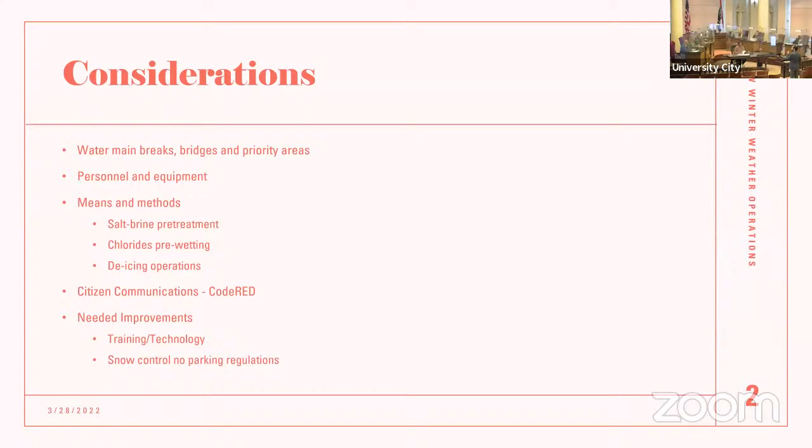Under the winter weather operations, I have the following considerations: water main breaks, bridges, and priority areas. Water main breaks, unfortunately, occur even in the winter time, during dry winter weather, and they cause icing hazards on our roadways. We cooperate and collaborate with the Missouri American Water Company for responses on these occurrences, and they are responsible for the public water supply.

They explain that the supply water temperature affects their infrastructure in the winter time, and they probably suffer from aging infrastructure also. We have an increasing trend, unfortunately, of these occurrences in the winter time. When these happen, we respond as well as demand the water company's response to secure and make safe those streets for the traveling public.

If they are private water lines, then the responsibility falls on the property owner to take action and have it repaired. There is a county program available for it, and usually we guide the property owners in that process to prompt their action. If not, we collaborate with the Planning and Development Department to take code enforcement action.

Bridges are our high priority during winter weather because they are exposed to cold air from above and below, especially a tall bridge such as the Old Bonhomme Road Bridge over the I-170 highway. Because of the airflow under that bridge, it tends to ice up faster than the others. So we need to prioritize those items of work.

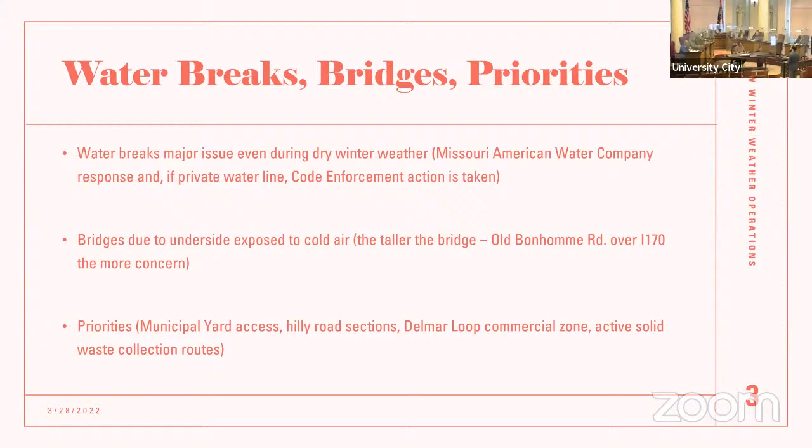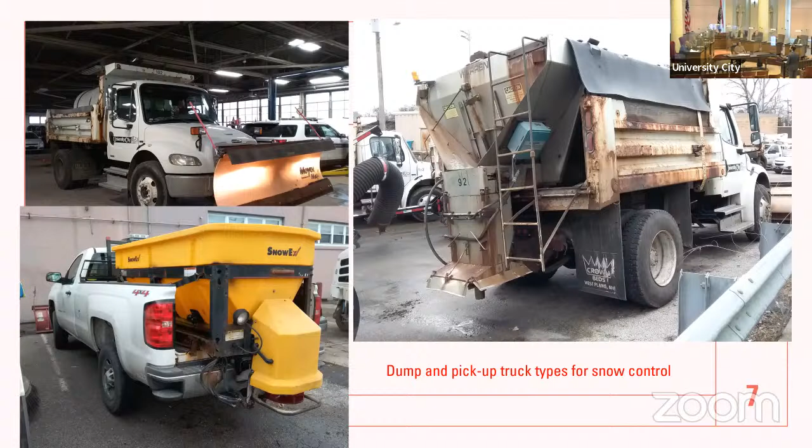Salt brine is made in the shop by adding water to salt and mixing. There's a mixing tank that creates a certain salinity for a liquid de-icer application. This is sprayed onto roadways before the forecasted winter weather system arrives, if the temperatures generally hold above 20 degrees Fahrenheit. Brine is not effective when we go below 20 degrees Fahrenheit. Brine prevents snow from sticking to the pavement and aids the plowing efforts, as well as allows the road to become drier quickly.

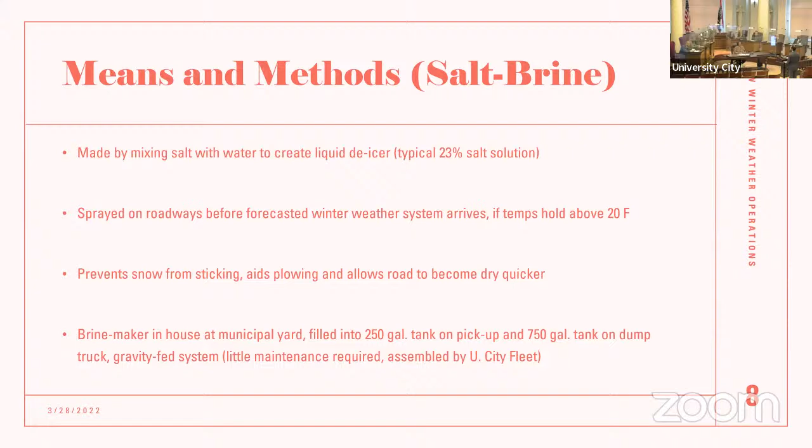This material is made in-house. We currently have a 250-gallon tank on a pickup truck and a 750-gallon tank on a dump truck. This is a gravity-fed system, so little maintenance is required. There's no pump between the tank and the sprayer; the only pump is used between the mixing tank and the truck.

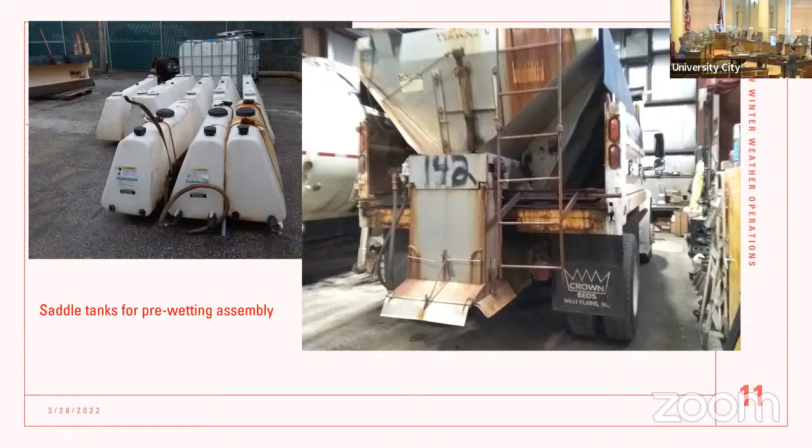Chlorides pre-wetting is another consideration. This is done by saddle tanks. I'd like to show you that. These are saddle tanks. Saddle tanks go under those triangular areas under the truck's spreader and are piped into the spinner, and before the material is dropped onto the roadway surface, this helps with wetting the salt.

Salt is more effective when it's wet, and it does not bounce off pavement when that happens, and this increases the de-icing effectiveness of the salt up to 30%, which is quite a bit. Salt brine effectiveness is reduced in low temperatures, such as 20 degrees or lower. For those applications, there's another material available, that is calcium chloride.

Calcium chloride is currently not in our arsenal, but it can easily be added. We have tanks available for it, and especially for pre-wetting operations, those saddle tanks, we would fill them with calcium chloride instead of salt brine, and use it that way. Plowing is still important. We need to plow first before applying the de-icing materials. And like I said before, those materials that remain on the pavement help with the later events when they occur.

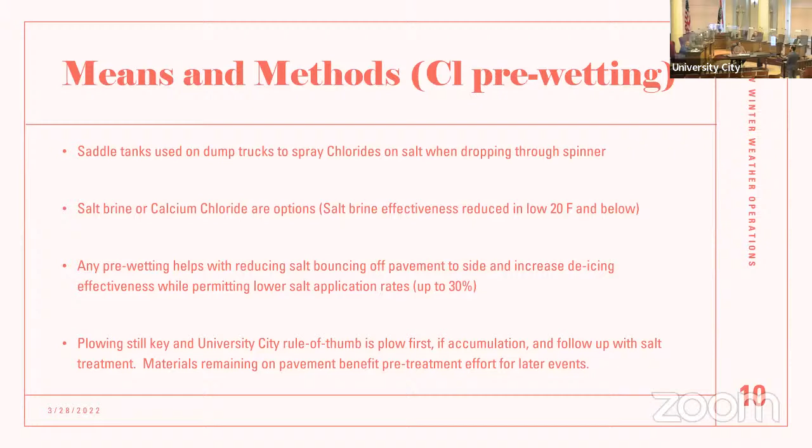For de-icing operations, one thing to repeat about salt is that salt does not actively de-ice until and unless it goes to liquid form or brine state. And so an ineffective method is to address everything after the fact. That is a top-down application. An effective method is a bottom-up application, that is pre-treatment and continuing plowing, so that when we plow, we open up that surface where we can apply more treatment so that it does not build up on us.

With the equipment and methods that are on hand, we can specifically tune our application to specific needs, so that calcium chloride can be used if we are down to the teens. Beet juice is another application that some agencies use in our area, that is used for longer effects. If the event has extended duration, beet juice tends to remain on the roadway and maintain its quality for a longer time.

We have not experimented with beet juice so far. It has some organic qualities that are not always desired, especially in residential neighborhoods. It has a little odor. But these are options that we have because of the equipment and ability we have in the shop.

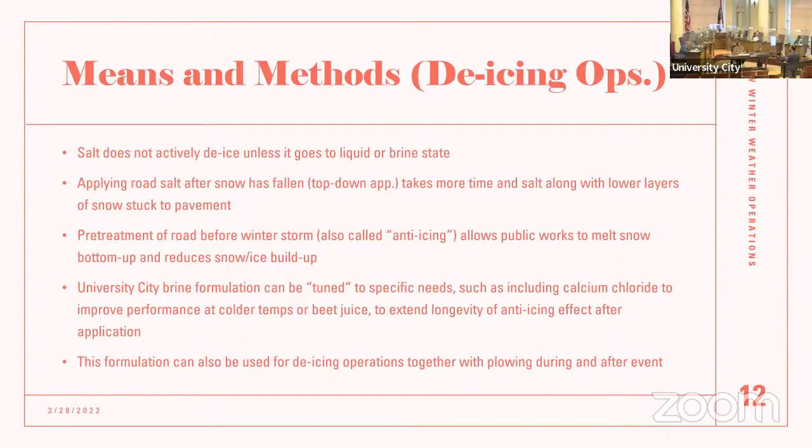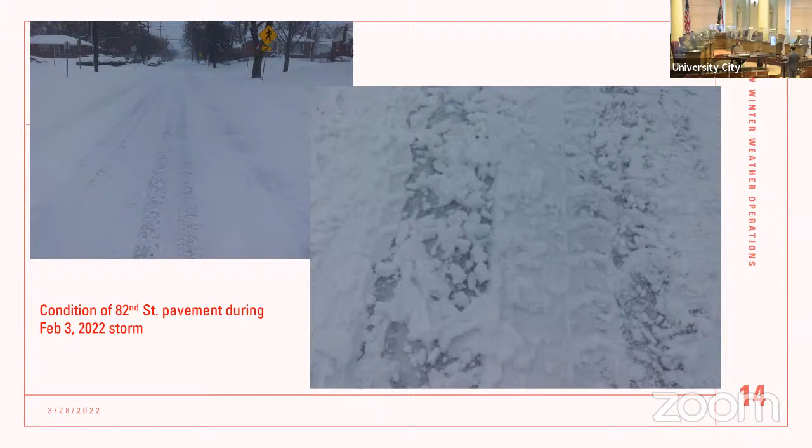Etzel Avenue, you can see that it's almost a complete whiteout condition there, and 82nd Street, in this case, was similar. The close-up picture shows the roadway surface that is starting to break up. What's needed there is another pass of the plow and then application of the de-icing material so that we maintain control over that pavement surface that we can open up.

One other consideration in these operations is citizen communications with our newly launched emergency communication system, Code Red. This system can be utilized for local winter weather alerts and advisories. It's an opt-in type of system, so residents are not in it until they sign up for it, and it can advise of upcoming operations and facility closures. As you know, during these snow events in February, we had some of those.

Needed improvements. Annual refresher training and new staff training is always a good idea. We strive to do that. Plowing operations and equipment calibration are some areas that we can cover. Our association offers training opportunities here, as well as in-house. We have some of that available.

Assignment of the same region to the same employee so that the employee is familiar with the area. It creates a higher sense of belonging, that's their area, they take care of it, they know the intricacies of the area. That has not consistently been applied. That is something that we can also start doing. Reliable tools and resources with maintenance support throughout the round-the-clock operations.

That has occurred in these last February events, so that we always had a mechanic in the fleet shop that was there standing by when the equipment breakdown occurred. We were able to get that maintenance quickly. These other things are technology enhancements with GPS systems, telematics, breadcrumbs type of tracking system so that the operator knows where the shift operator before him or her left the operation, so that they pick it up from there, so we don't leave anywhere not covered.

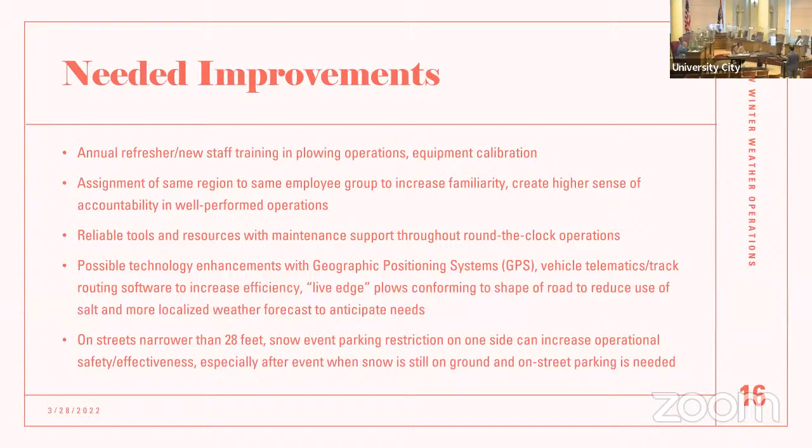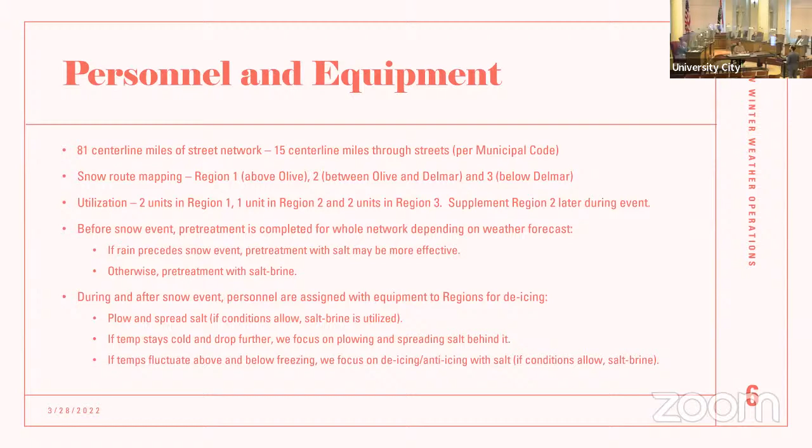And I recognize that we don't have any control over that, but just for listeners and for our residents, the state would take care of Olive Street, and then the county would take care of Delmar and Hanley and North and South and Midland. How fast do they get their crews out? And could you explain to our residents why sometimes those streets may be delayed in getting cleaned?

County is pretty much on top of it because their network is more extensive than the state's. State only has one line that gets into University City, and that's the end of their line. It's not a grid. It doesn't serve any other roadways within their network. So we may have some delays with the state's response, MoDOT's response. We have gotten out to Olive in the past sometimes to plow when it came to that. And then finally, are there any environmental impacts of the different chemicals that are used, such as the chlorides or the salt brine, in terms of runoff into the River des Peres or anything like that?

Actually, any one of those liquid de-icers help with reducing the salt application rates. The granular salt we drop on these roadway surfaces is probably the most harmful material in terms of the creeks and the environment. And so whenever we use the liquid de-icers, that effectively decreases the rate of salt application. So they help with that.